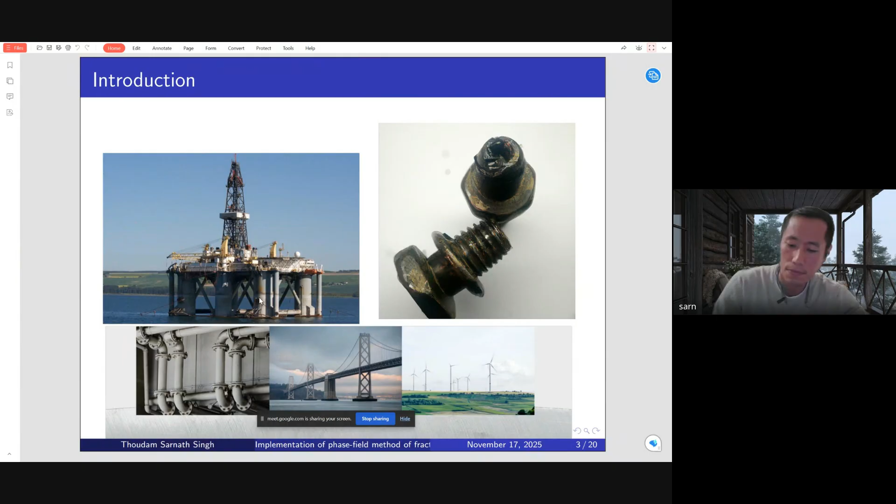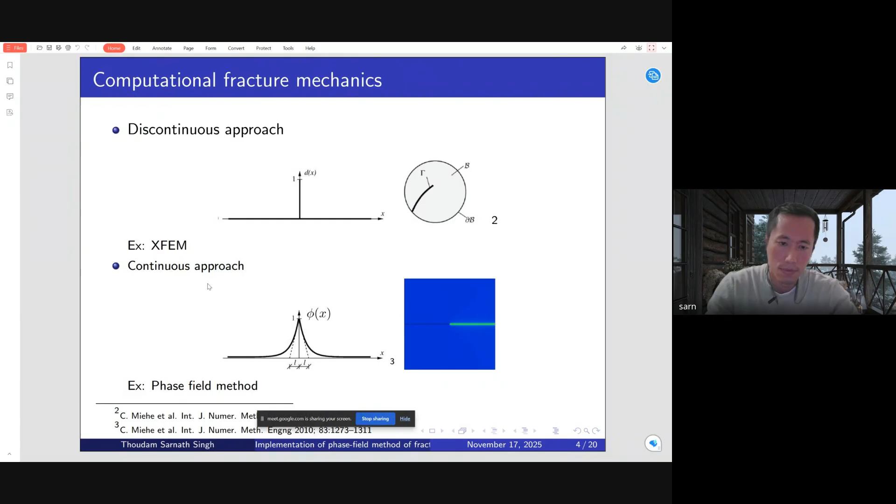So why are we using the phase field method? In the phase field method, crack initiation, crack propagation, crack merging, and crack branching can all be achieved without having any ad hoc criteria. What I mean is that crack initiation, propagation, merging, and branching are governed by the minimization of the energy functional, which we'll see in the upcoming slide.

Also, because of using the smooth function, we don't need to track the crack path. In the discontinuous approach, we need to know the crack surface area, but in this approach we don't need to know the crack surface area. That is one advantage of this function. Especially when we have very complex cracks in 2D and 3D structures, this method is very good, because it is very difficult to track the crack path when we have a very complex crack system. So these are the advantages of using the phase field method.

Now let's look at what is the smooth function. As I have said earlier, in a sharp crack, this rod has a sharp crack at its center, and this is represented by using a sharp function or a discrete function.

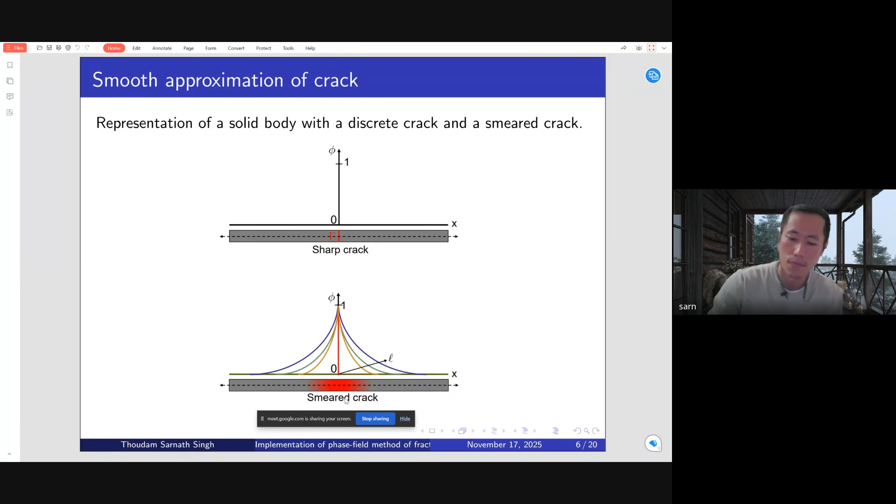So what kind of smooth function can we use to represent the smeared crack? We need the condition that at x equal to 0, the value of phi is 1, and at very far away distance, phi is 0. So from phi equal to 0 to 1, there is this smooth transition.

This kind of function can be represented by e to the power minus mod of x divided by L. This is not the only function. We can use other functions also, provided they satisfy this condition: at x equal to 0, phi is 1, and at x equal to plus minus infinity, phi is 0.

So this function is very commonly used in many of the literature. We can also come up with other functions. For my work, I have used this function. So using this smooth function...

Now first, let's look at the potential energy of a solid. When a load is applied to a solid, the total potential energy of the solid is the internal energy stored in the solid minus the external work done. And what is this internal energy of a solid?

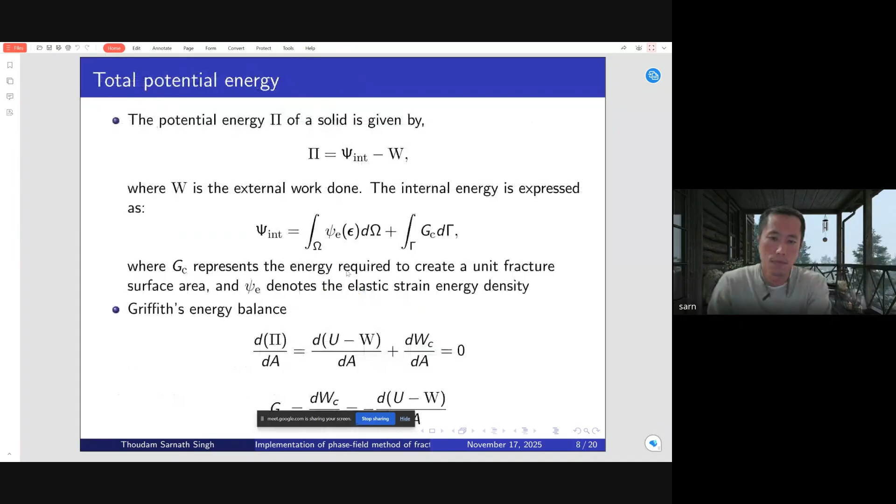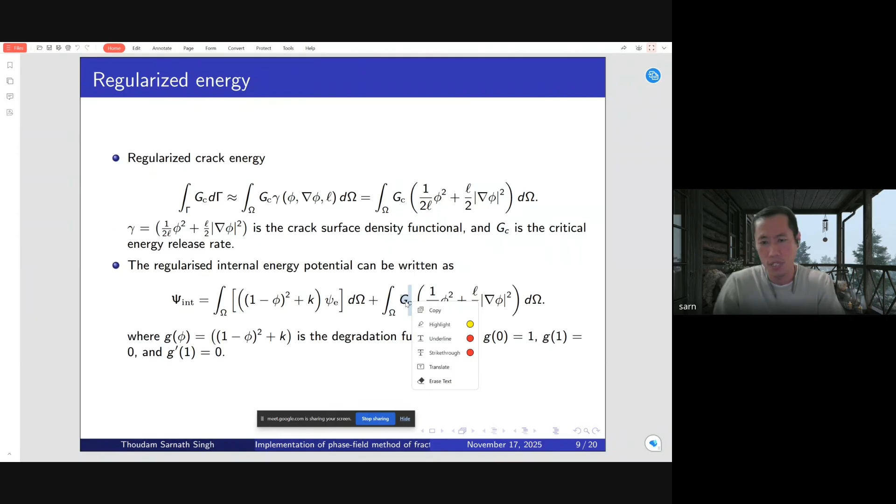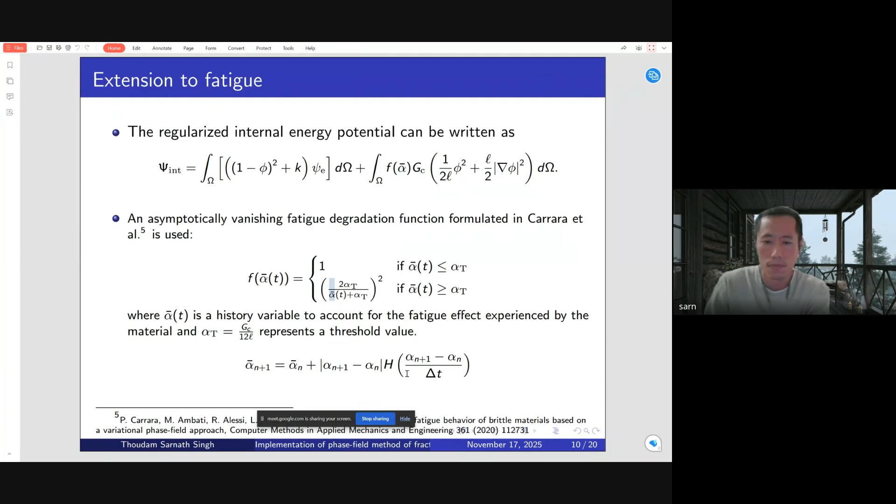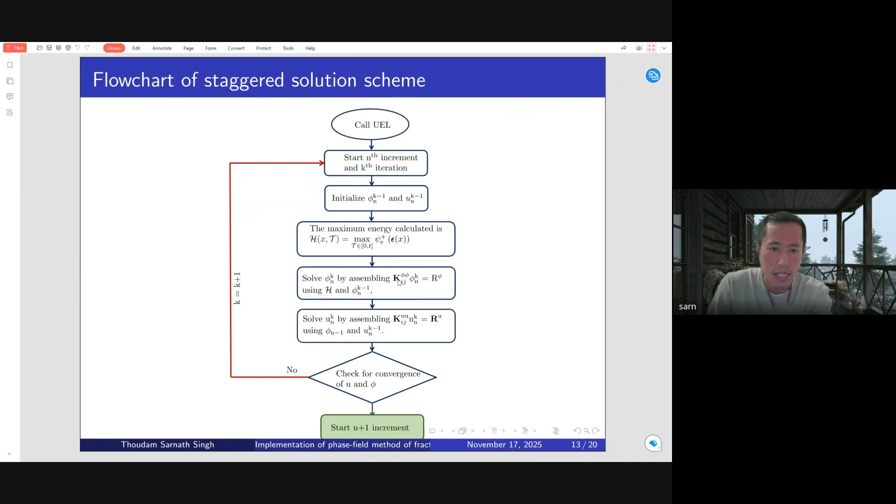So here the k is the tangent stiffness matrix, and here r is the residual vector. So what is this residual vector? Let's see in the upcoming slide.

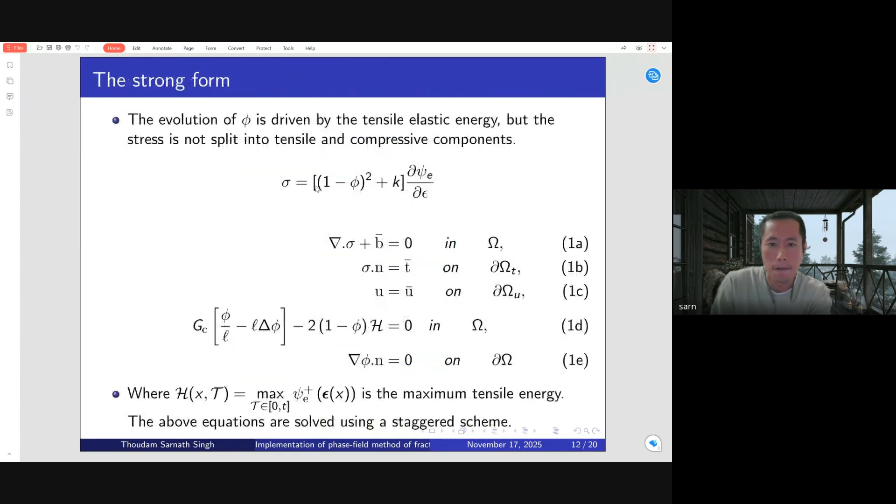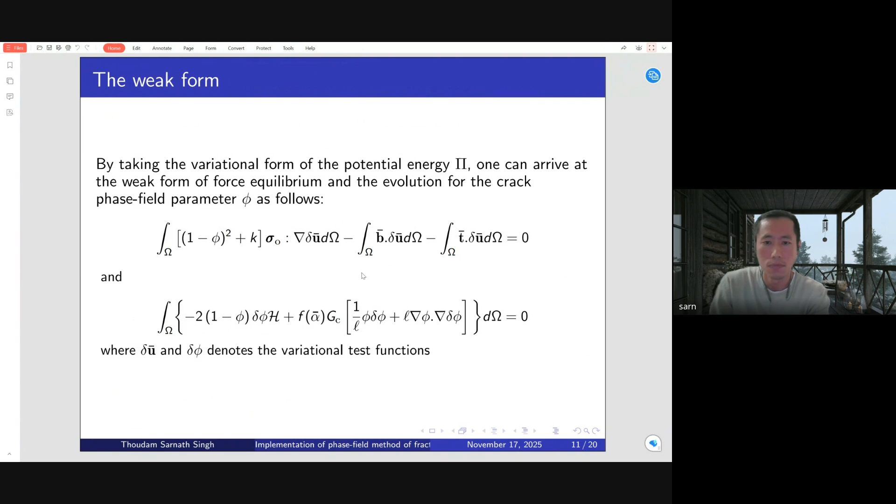So the entire expression is the residual vector. If you look at the previous slide, the entire thing is equal to 0, and we are saying that this entire thing is the residual vector. So we want the residual vector to be very small - the smaller it gets, the better solution we can get.

This is the residual vector for the force equilibrium equation, and this is the residual vector for the phase field evolution equation. And this is the tangent stiffness matrix for solving the displacement, and this is the tangent stiffness matrix for solving the phase field equation.

In the earlier slide, I have shown that in this matrix we have k u u and the k phi phi. But we have this term 0 and this term also 0. So these two terms are 0 because...

when we are solving using the staggered scheme, when we are solving for the displacement, we are taking the phi as a fixed value, and when we are solving for the phi, we are taking the displacement as a fixed value. That's why when we differentiate the residual vector for the displacement with respect to phi, it is 0, and when we differentiate the residual vector for the phase field phi with respect to u, it is 0. So because of this, we have 0 here and 0 here as well.

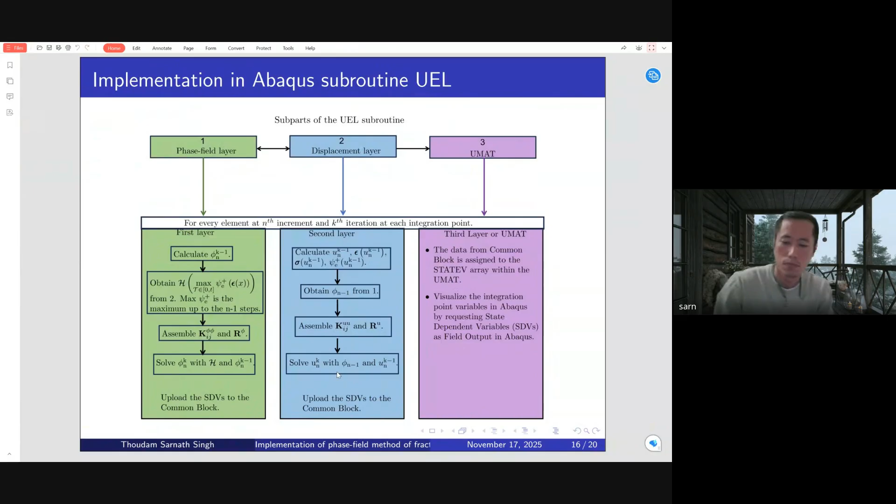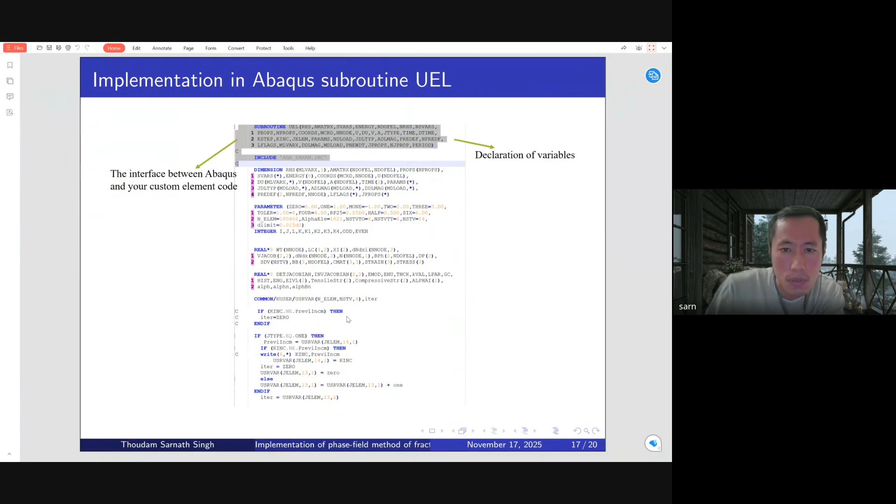So in the UEL, what we are actually writing is the weak form. I have shown the weak form in the previous slide. So once we have to discretize the weak form, we have to essentially write it. So here, in the A matrix, I have written the stiffness matrix, which I showed earlier.

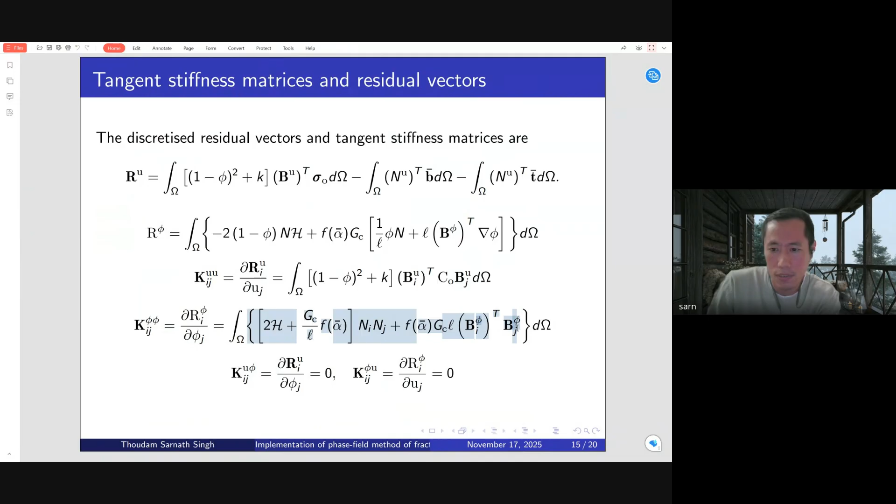This stiffness matrix for the phase field is defined here. So in the UEL, we have to define the stiffness matrix and the residual vector. In the A matrix, I have defined the stiffness matrix, and in the RHS, I have defined the residual vector.

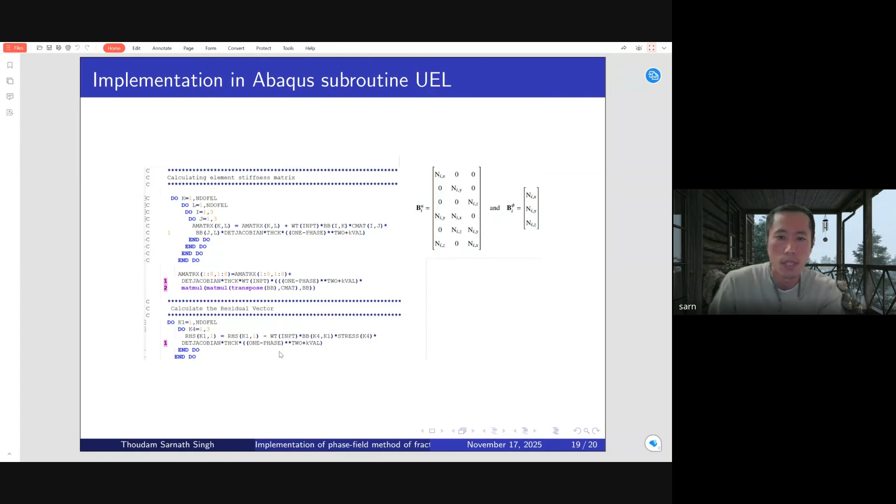So with this, I want to conclude my talk, and I have some simulation that I would like to show. After that, if you have any question, I will take them.

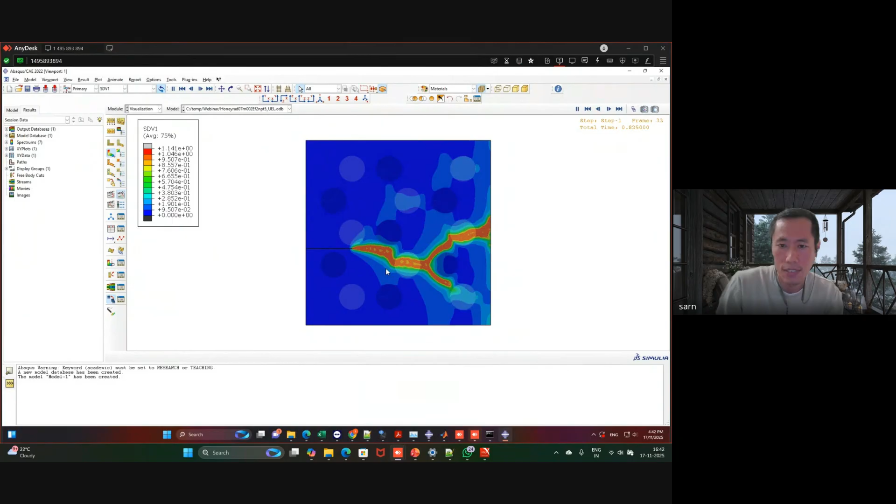Now I will run this. So you can see that, as I said, this region is the harder material and this is the softer material. The softer material attracts the crack, so the crack tries to move towards it. And here we have a harder material, and the crack tries to avoid it. Why does this happen? Because of the local stress distribution.

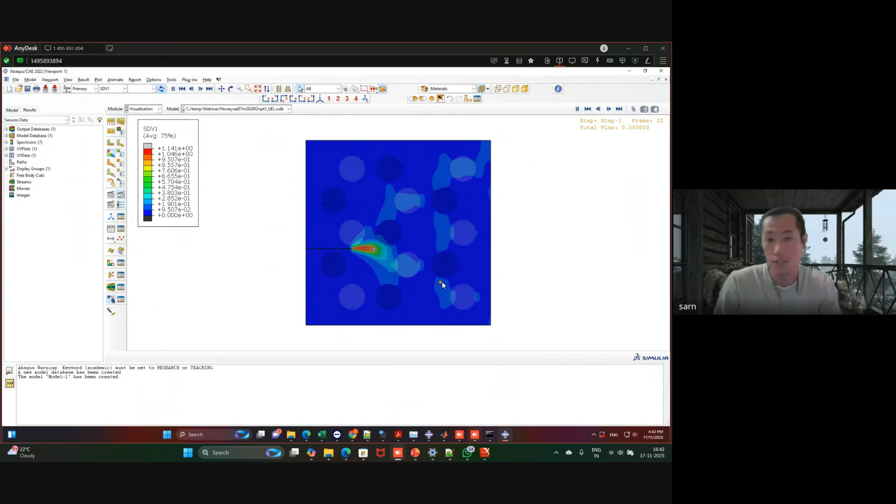And I will also show you the load versus displacement plot. So as the displacement increases, the load increases, and at this point the crack starts to appear, and then the load drops, and we have these kinks on the load versus displacement plot.

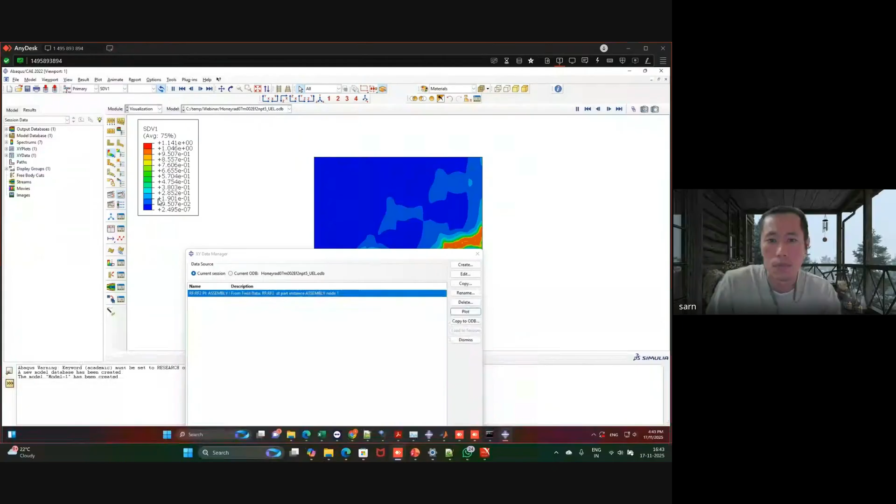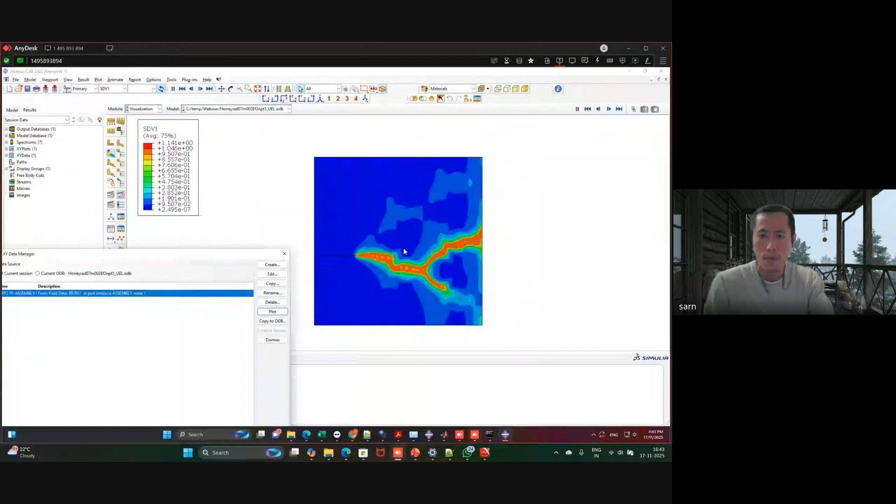In this case it is a load versus time plot. These kinks are happening because the crack is not going on a straight path. It has to deflect when it comes across the hard region. So while deflecting around the harder region, we can see the kinks on the load versus displacement plot. This is a region where the crack is trying to avoid the hard phase, or the hard region.

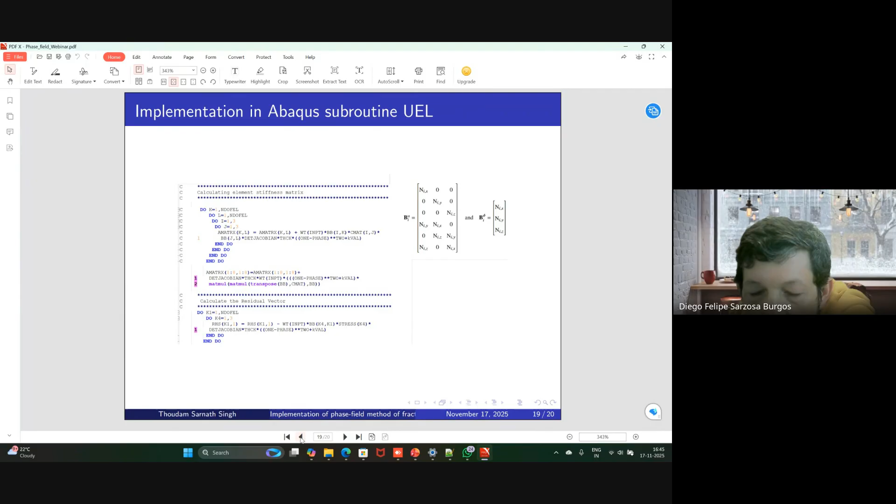I don't know if you have a backup slide showing the possibility of simulating more than two fields, like what we are doing now. For instance, the mechanical problem, the diffusion problem, and the damage problem. Because, yes, we can do that. As Sarnath has said, the important thing here is we can solve many differential equations governing different phenomena.

So the idea is to have the residual and the stiffness matrix for all these partial differential equations, so we can solve everyone in a coupled manner somehow. So we have a couple of questions here. I think Rodrigo and then Briggs.

Okay, hello, good afternoon. Let me ask a question about hydrogen embrittlement. How could we simulate that or set up the equations? And also, if we have residual stress, how could we implement that? So if you want to implement hydrogen diffusion in the system, then we would have three coupled equations. I hope you can see this expression here.

We have the force equilibrium equation, the second one is the hydrogen diffusion equation, and the last one is the phase field equation. So now we can solve these three coupled equations, and then we can model the hydrogen diffusion in the material.

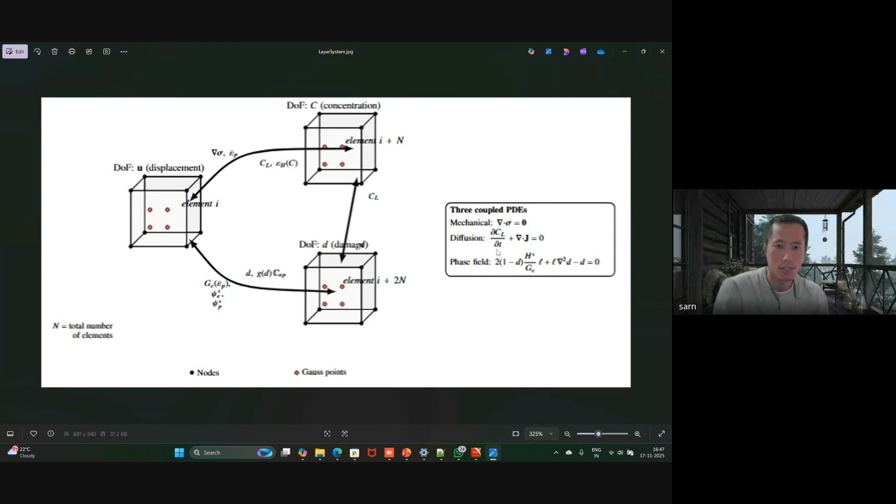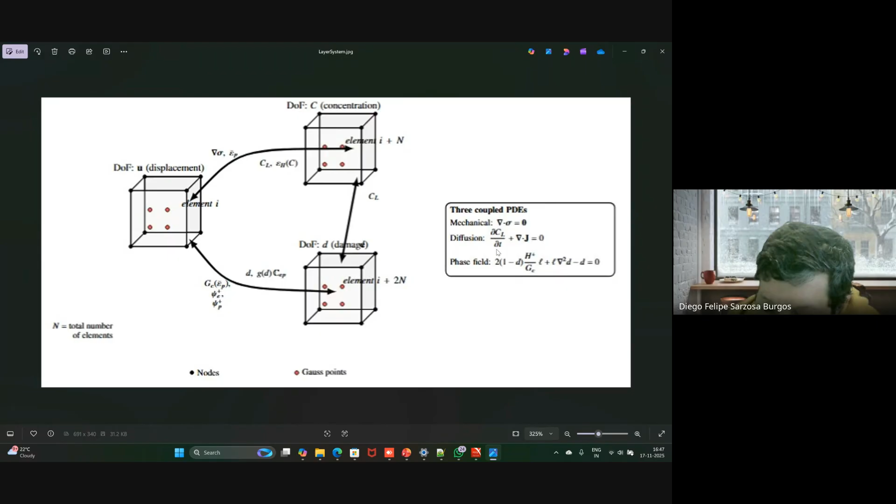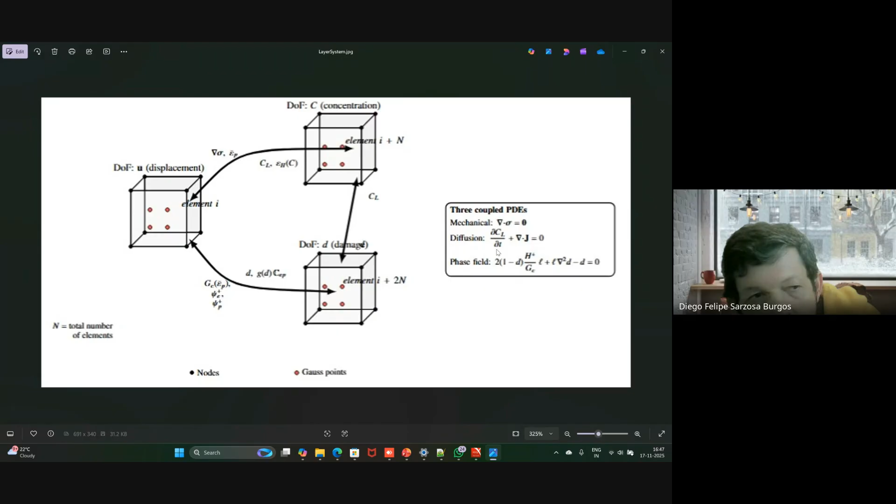And he also was asking about residual stresses. I think you can include it at the beginning of your model, like a constraint value, right? Yes, we can include it at the start of the simulation, as an initial state. I think also it's possible to try to model the process of introducing residual stresses, but you can use it at the beginning as an initial condition. It's not necessary to include this in the equation; we will consider this residual stress in the initial state. Okay, initial condition. I think Luis.

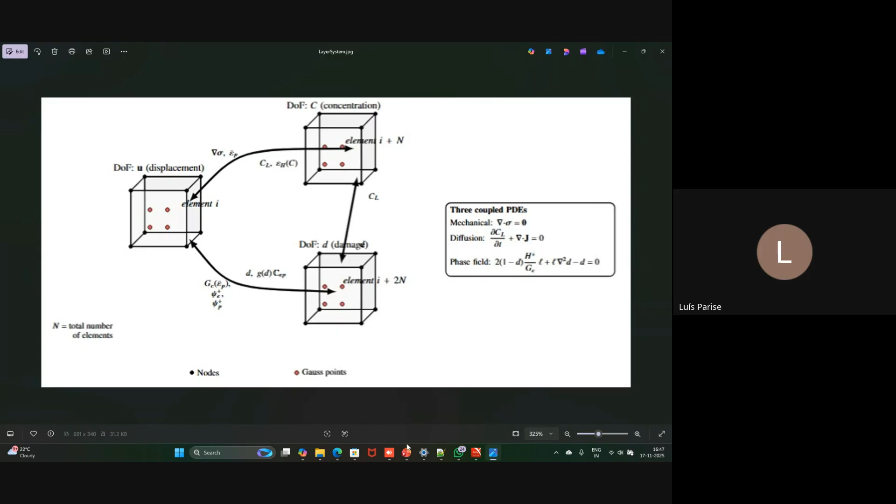Yeah, I think there's someone ahead of me. Nathan, okay, thank you. Please, hello everyone, thank you for the presentation.

Relating this to elastic plastic fracture mechanics, taking that it is limiting for the HRR equation, what is the limitation of this phase multiphysics problem regarding the elastic plastic, related to the stress strain fields?

You are asking about the limitations of this phase field method. Yes, it can be used for ductile materials also. The major limitation I am aware of for the phase field method is that it is computationally very expensive, and you also have to refine the mesh where the crack is expected to grow. This leads to a very high number of mesh elements, which can cause very high computational cost.

Maybe I can say something. Nathan is also interested to know what happens when there is plasticity, because he's asking about the limitation of the common elastoplastic fracture mechanics. There is actually no limitation regarding this—the method has been extended to include plasticity.

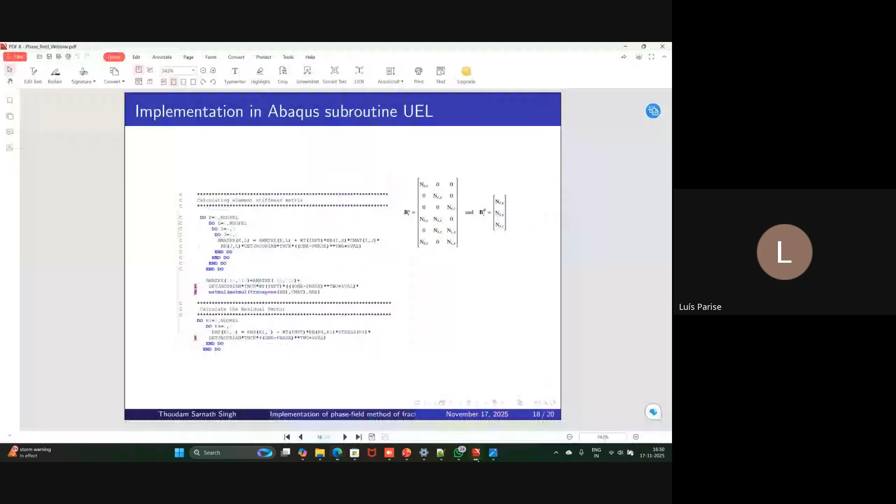I was wondering, when you choose the continuous phi function you talked about at the beginning of the presentation, you are choosing an exponential decay. What's the sensitivity of the results if you choose maybe a narrower or wider decay, or a type of function that's not exponential but still decays to zero at infinity? What guides the choice of function for this type of problem?

I have not actually explored different kinds of this smooth function—I have used what is mostly used in the literature. I agree that if you have a different choice of function, it would definitely have an effect on how the material responds, but I cannot really comment on how it would behave, because I have not really explored it in that way.

What Sarnath has done is follow what other people were doing in the past—everyone has chosen this type of function to model the phase field evolution. I don't know if someone is exploring that, but in the way it has been selected, it is working properly.